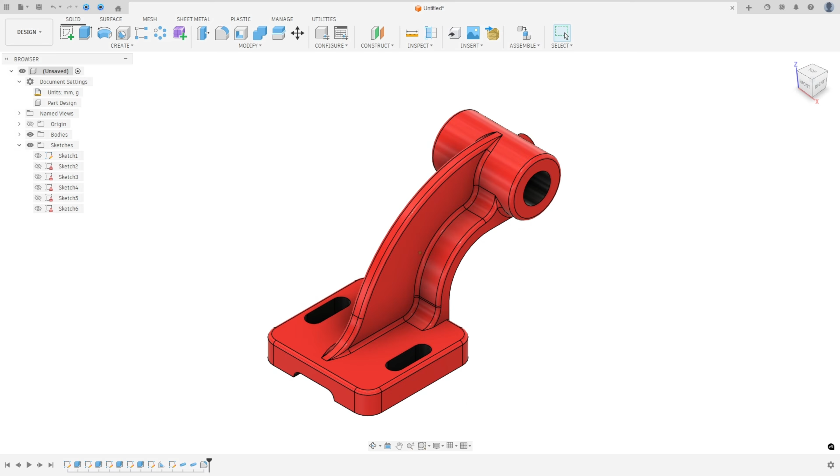The first step to create this part, we will select the top plane and create this sketch. We will create the base first. The base is a square, 80 millimeters by 80 millimeters, and in the corners we have a fillet with 10 millimeters of radius.

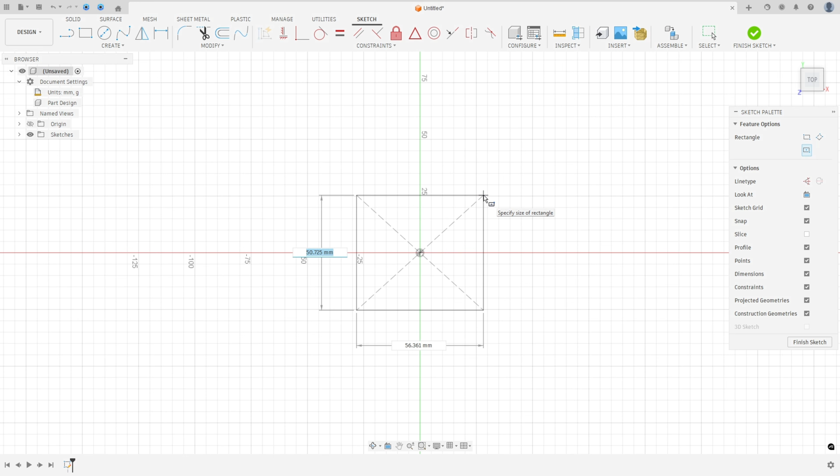So we'll open Fusion, go to create a sketch and select the top plane. Select 2-point rectangle, center rectangle, click here in the midpoint, 80 millimeters by 80 millimeters. And go to fillet, make a fillet here with 10 millimeters of radius. Press OK.

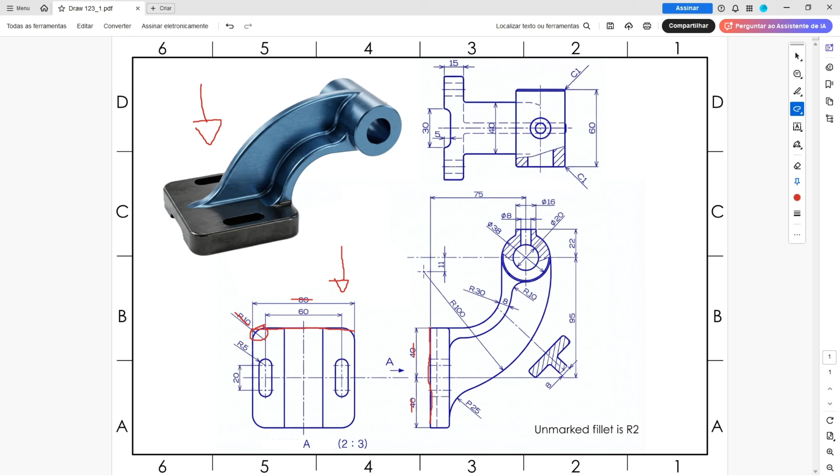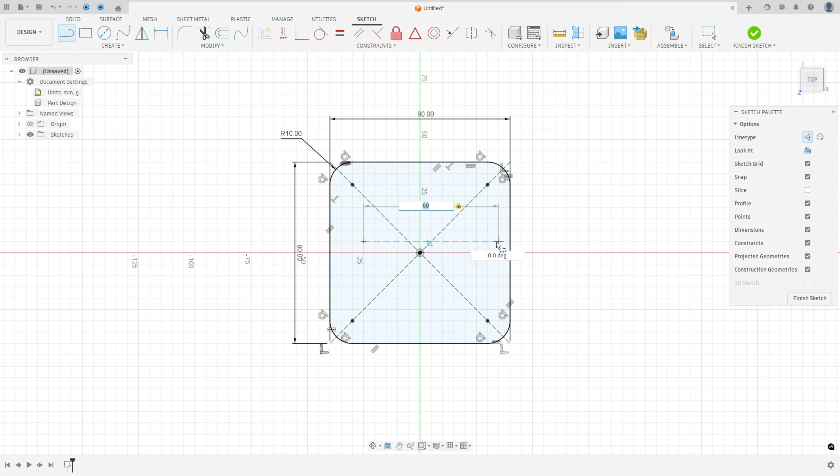Now we will create this slot. But first we'll create this center line here. The distance between this slot and this one is 60 millimeters. So select line, a construction line, make a construction line here with 60 millimeters of length. Go to constraint, select the midpoint, select this line and the center point here. I will hide some constraints here.

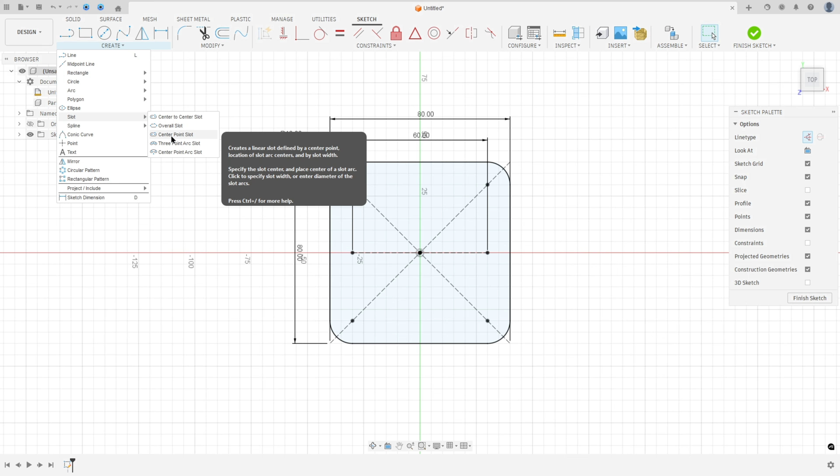Now we will create the slot. The slot has 20 millimeters and the radius is 5 millimeters. So go to create, select slot, select center point slot, click here in the midpoint, remove the construction line type. Make a slot here. Go to sketch dimension: the distance here is 20 millimeters and the radius here is 5 millimeters.

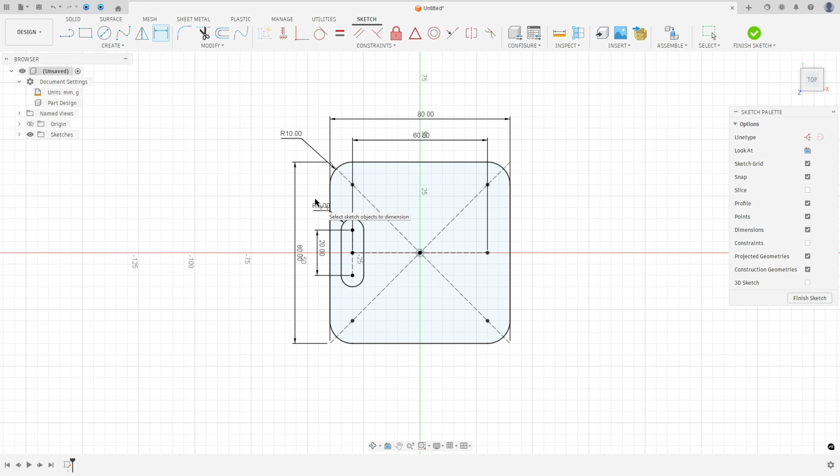Select line, a construction line, make a construction line here in the center, and go to mirror, select this slot, and the mirror line is this construction line. Press OK. We made this one.

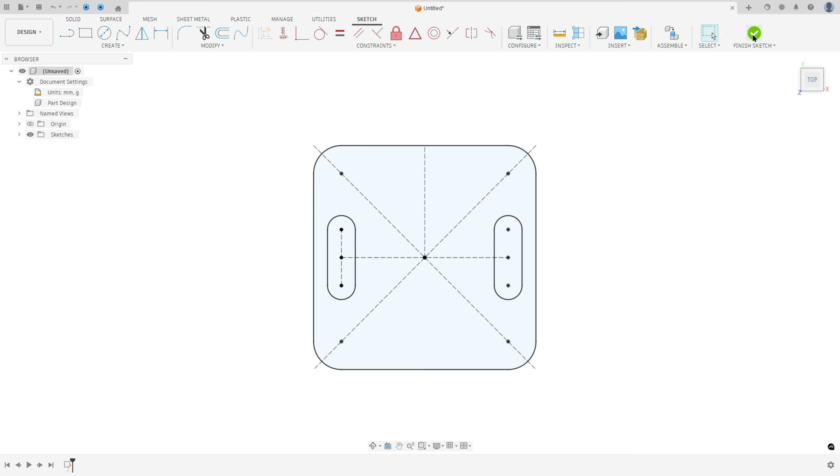Now finish the sketch. We need to extrude this 15 millimeters. So go to extrude, select this profile, 15 millimeters of length, operation new body, and press OK.

Now we will create this cut in the bottom of the base. This cut has 30 millimeters by 5, and here the fillet will be 5 millimeters. So go to create a sketch and select this face, select a 2-point rectangle, make a rectangle here, 5 millimeters by 30 millimeters.

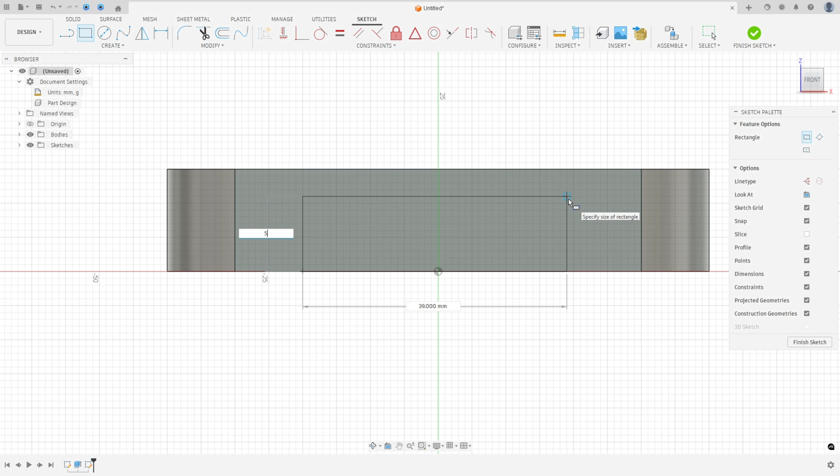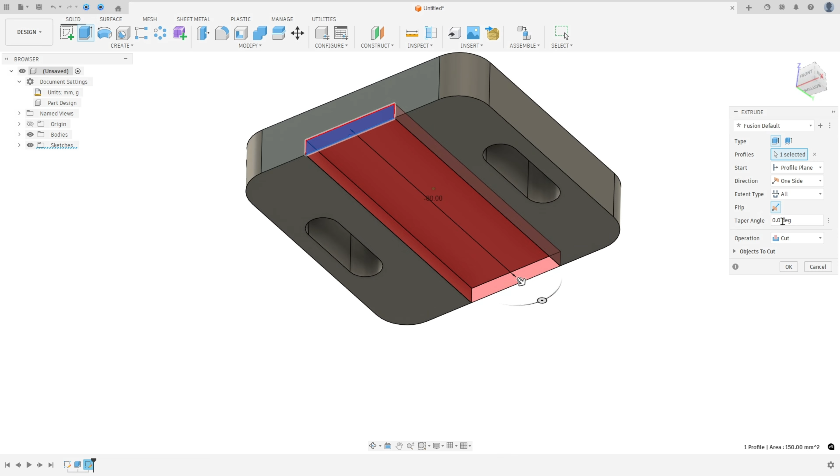Go to constraint, select the midpoint, select this line and the center point here. Finish the sketch, go to extrude, select this profile. The extent type, select all, flip the direction. Operation here is cut, press OK. Now go to fillet, select this edge here and this edge. The fillet here is 5 millimeters, press OK.

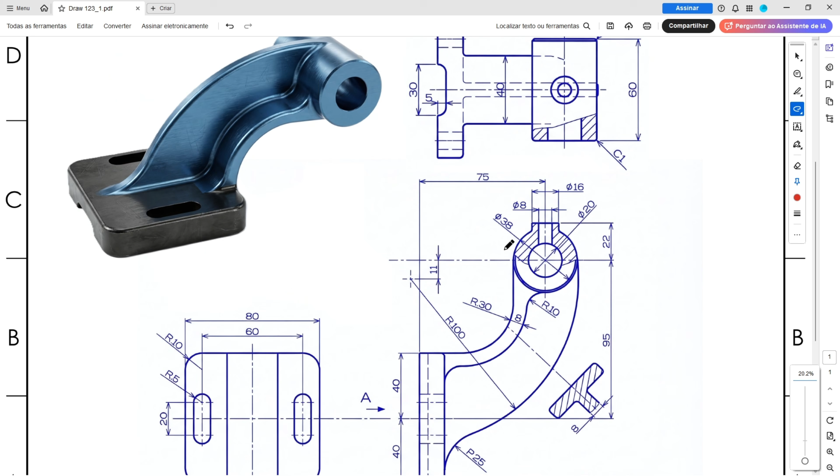Now we will create this cylinder. The cylinder is 2 circles with 38 and 20 millimeters of diameter. So go to create a sketch and select the right plane.

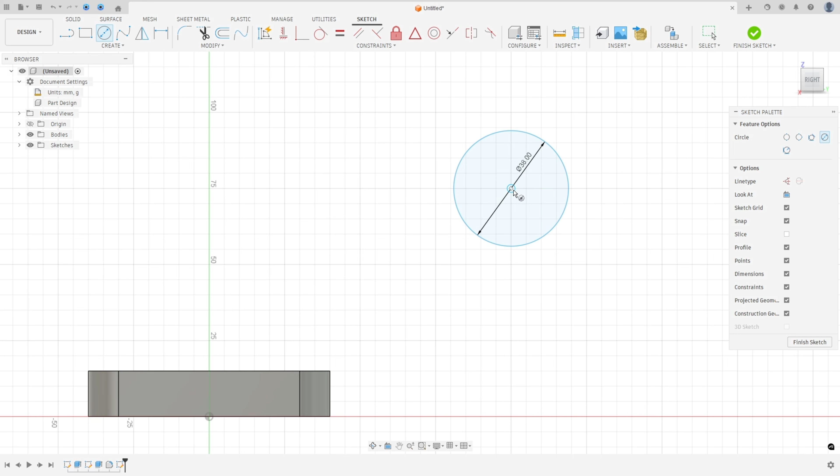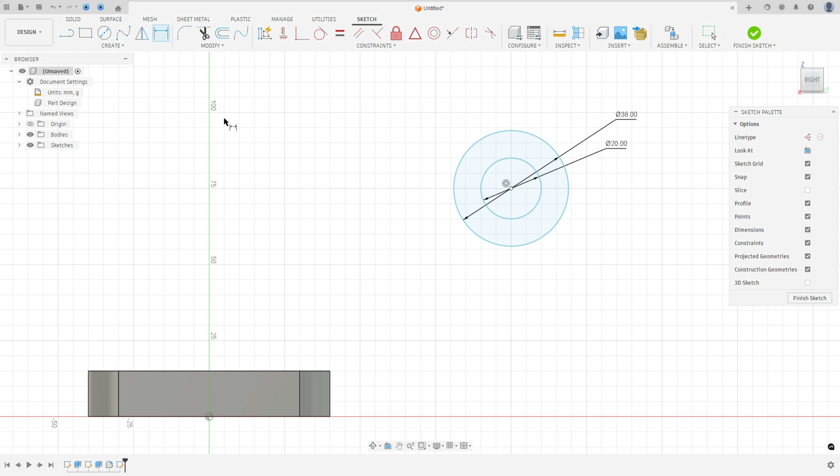Select a circle. Make a circle with 38 millimeters of diameter and another one here with 20 millimeters of diameter. The distance between the center of this circle and the midpoint is 75 and 95. So go to sketch dimension: the distance here is 75 millimeters and the distance here is 95 millimeters.

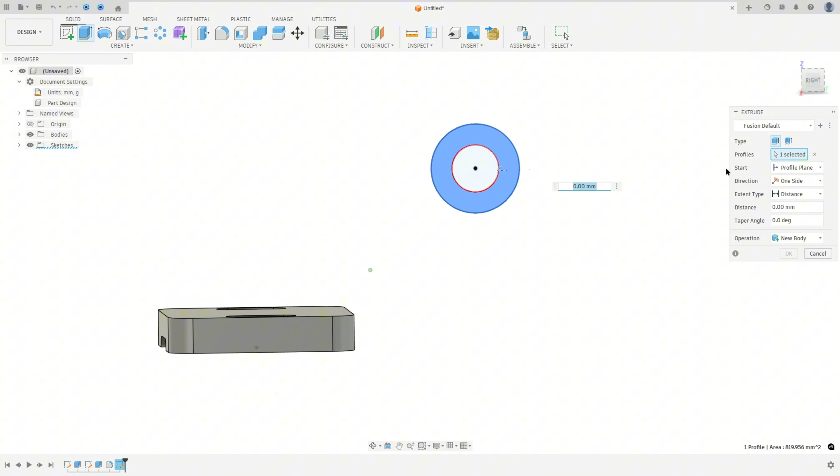Finish the sketch. We needed to extrude this 60 millimeters. So go to extrude, select this profile. The direction, select symmetric, measurement whole length, and the distance here 60 millimeters, press OK.

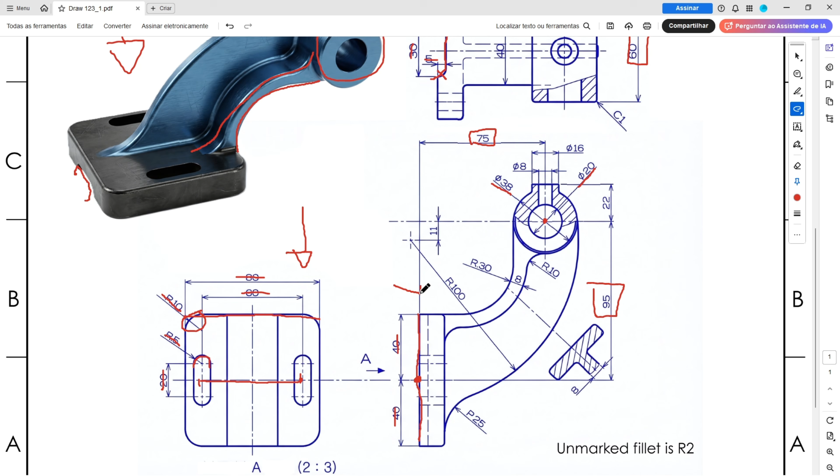Now we will create this area. We will select the right plane and make this sketch. The first thing we make here, we will create a line, an arc, and another line. This line is coincident with the circle, and this point here is vertical with this point.

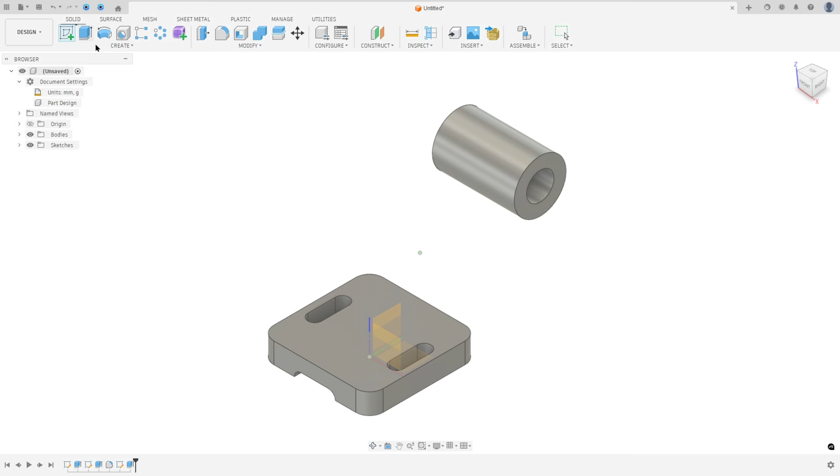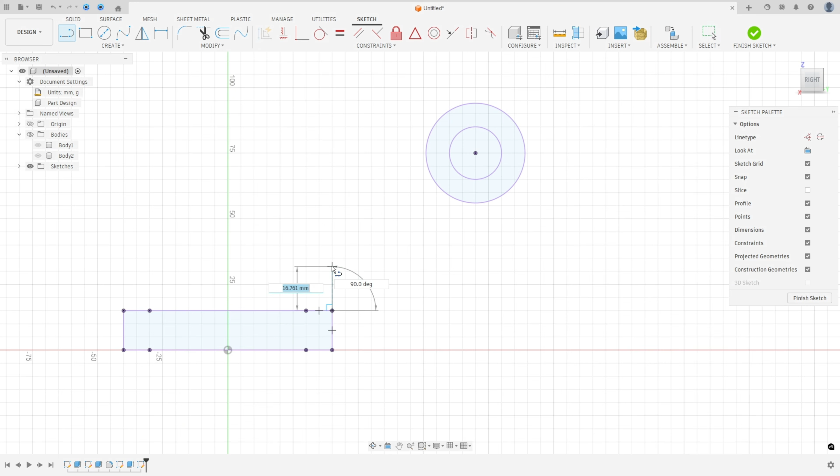So go to create a sketch, select the right plane, and go to create project, include project, selection filter. Select the body, select these two bodies here, and press OK. I will hide this body a little bit. And here select line, make a line here, make an arc and another line here.

Go to constraint, select tangent, select this line and this arc, and make sure that this line is tangent with the circle. Go to horizontal vertical, select this line here, make sure that this line is horizontal and this one is vertical. The radius here is 30 millimeters. So go to dimension, select this arc, the radius here 30 millimeters.

Now we will create this sketch here: an arc here, another arc here, and another one here. This arc has 10 millimeters of radius. This one has 100 millimeters of radius.

Go to create, select the arc, 3-point arc, make an arc here, and make another arc here. And I will create a line here.

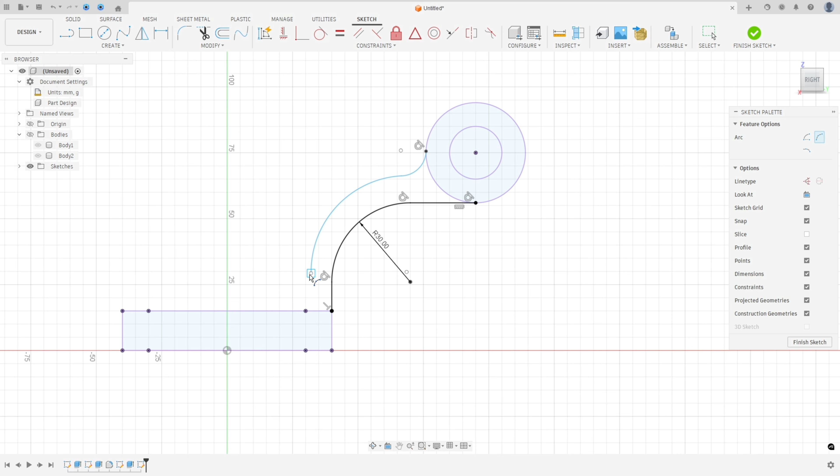Go to constraint, select concentric, select this arc and this one. Go to dimension. The radius here is 10 millimeters. Make sure that this arc is tangent with this one.

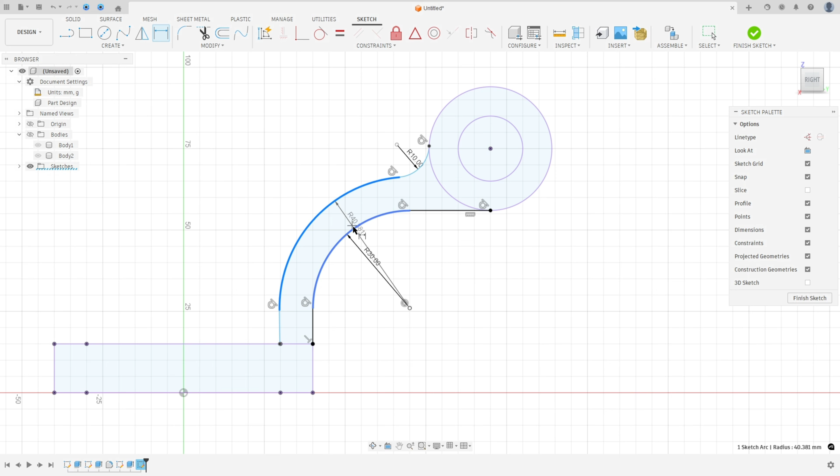The distance between these two arcs is, I said 100 millimeters, but that is wrong. The distance here is 8 millimeters. The 100 millimeters is for this other arc here, which we will make later.

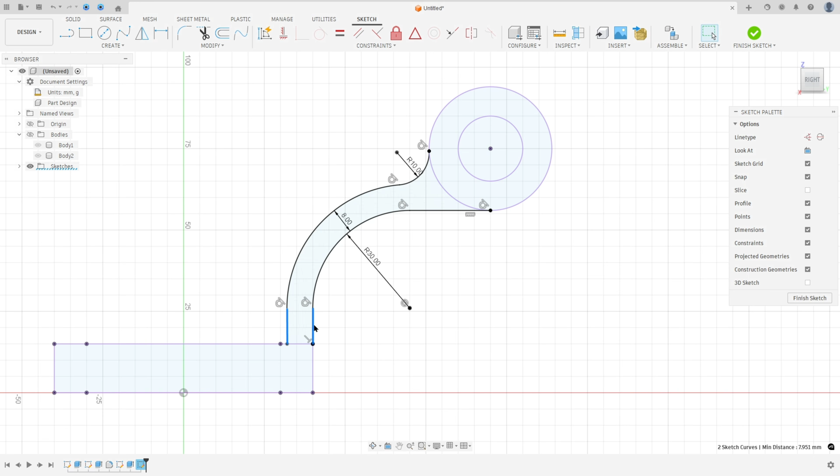And the distance between these two lines, make these parallel lines. Now we will create this arc here, tangent on both sides. Go to arc, 3-point arc, click here and click here, make an arc here, and go to constraint, select tangent, select this arc and this arc here.

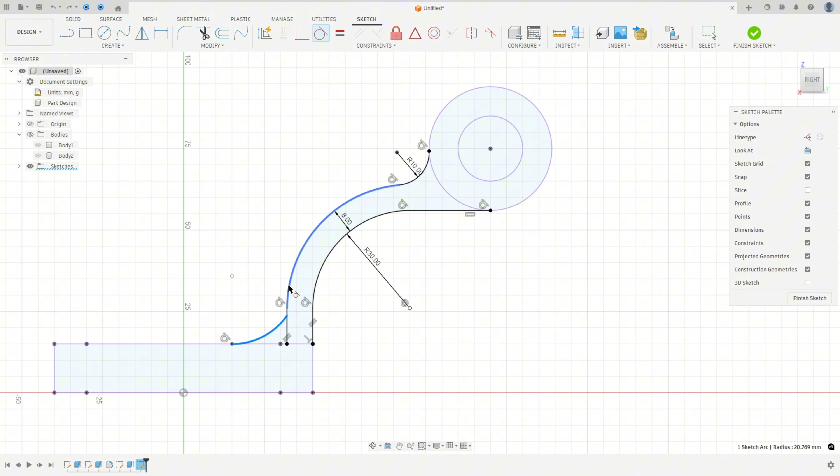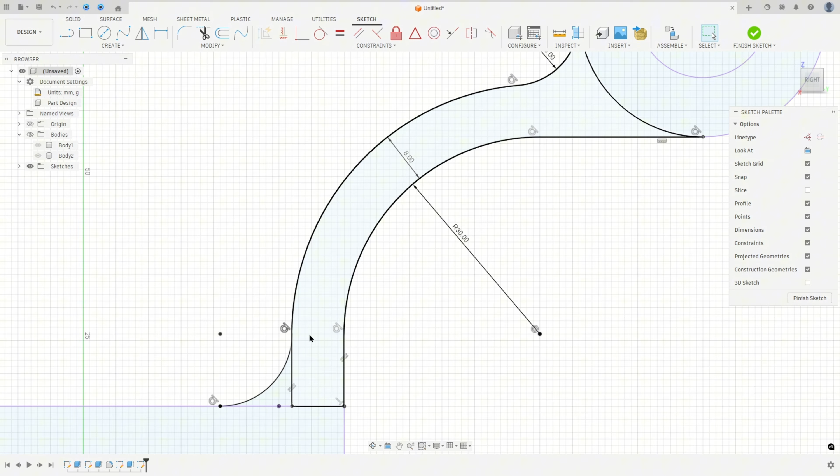Make sure that this point here is coincident with this arc. Go to modify, select break this line here, and make this a construction line type. We made this profile, so finish the sketch.

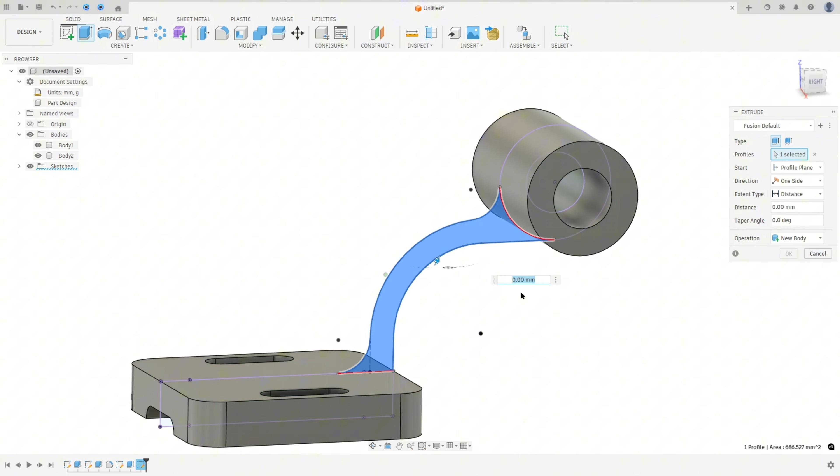Go to extrude, select this profile. We need to extrude this 40 millimeters. So the direction symmetric, measurement whole length, and the distance here 40 millimeters. Operation join and press OK.

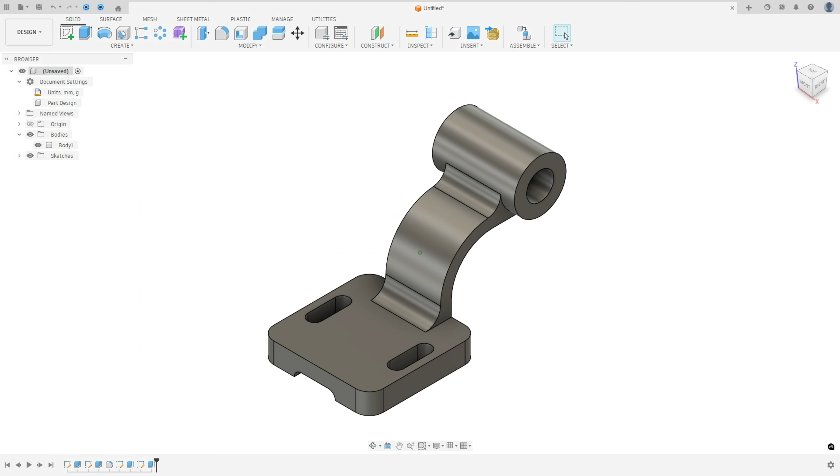Now we will create this rib. This rib has 100 millimeters of radius, and we have another arc here with 25 millimeters of radius. Go to create a sketch, select the right plane, press letter P in the keyboard, selection filter body, select this body here and press OK.

Go to create, select arc, 3-point arc. Click here in this circle, make an arc here, and make another arc here. This arc must be tangent on both sides, and go to sketch dimension. This arc here has 100 millimeters and this one has 25 millimeters.

And the distance between the center point of this arc and this point here is 11 millimeters. Let me move this point here a little bit. Go to dimension, the distance here, 11 millimeters.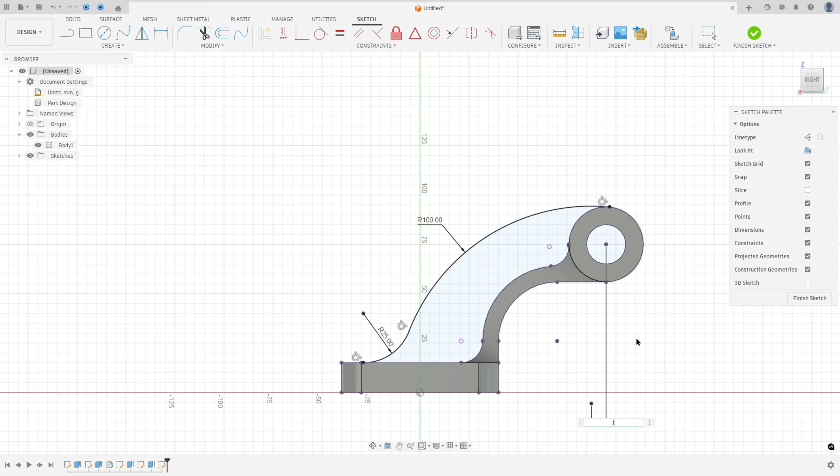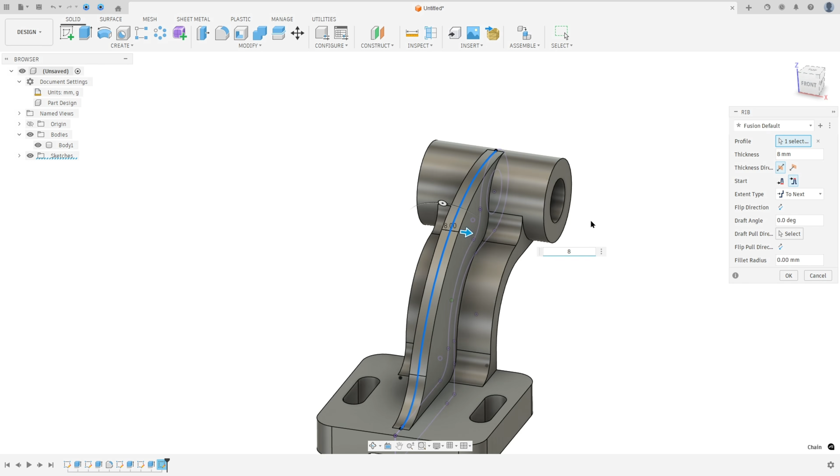Finish the sketch. Go to create and select rib. The profile, select this one, this line here. The thickness here is 8 millimeters, and the thickness direction symmetric, press OK.

Now we will create this cylinder here. The diameter 16 millimeters and the distance between this face and this point 22 millimeters. And we will create this cut with 8 millimeters of diameter.

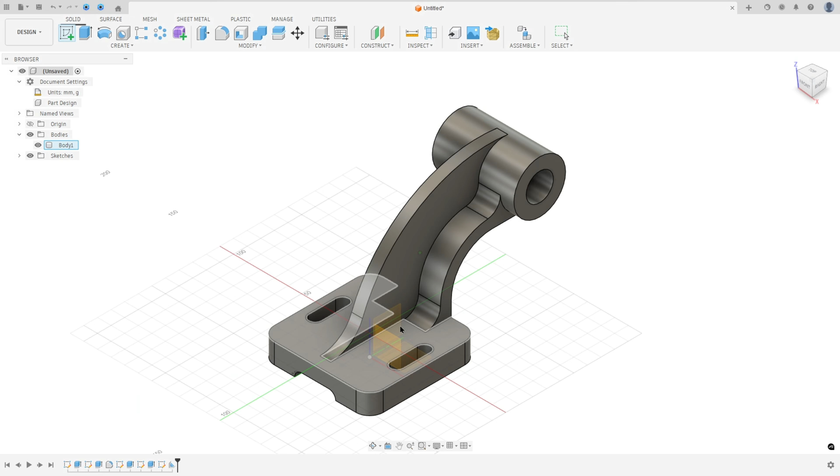Go to create a sketch, select the right plane, and go to create, select project include, project, and selection filter specify the entities, select this face here and press OK. Now select line, make a line between this point and this circle here, and make a line between this point here to here.

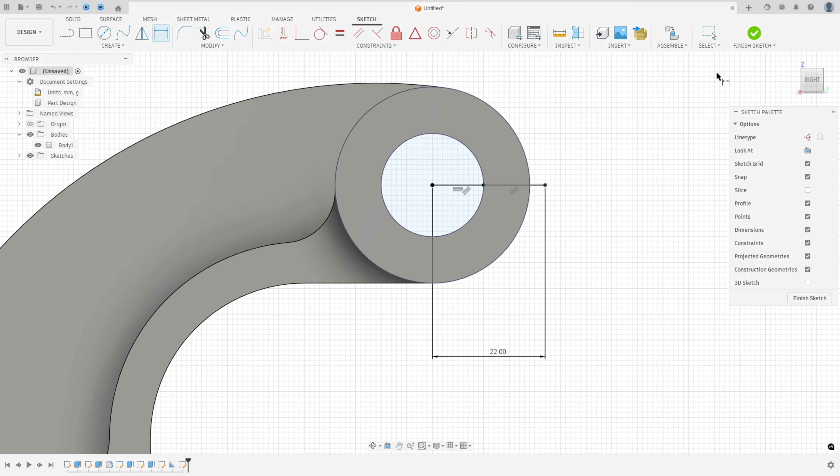And go to sketch dimension, select this point and this point. The distance here is 22 millimeters. And finish the sketch. Go to pipe.

Remove the chain selection. Select only this line here. The section size here is 16 millimeters. Operation join and press OK.

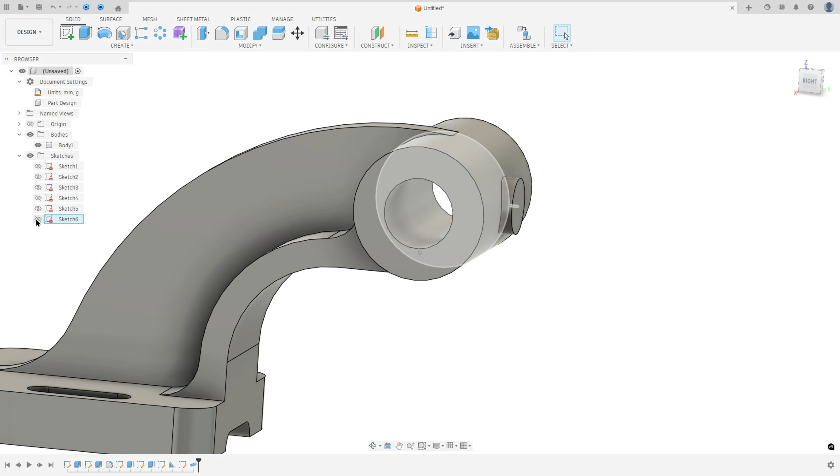And show the sketch 6 again. Go to pipe, activate the chain selection. Select this line. The section size here is 8 millimeters. Operation cut. And press OK.

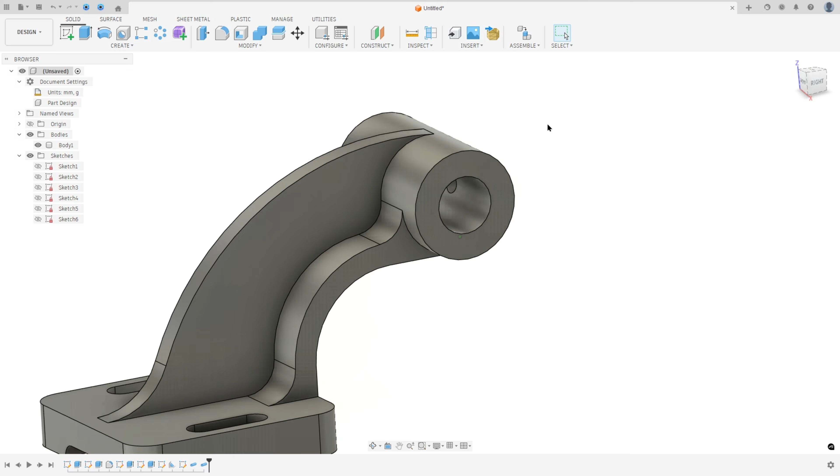Hide this sketch. And now we will make some fillet here. The fillet 2 millimeters. So go to fillet, select this edge here.

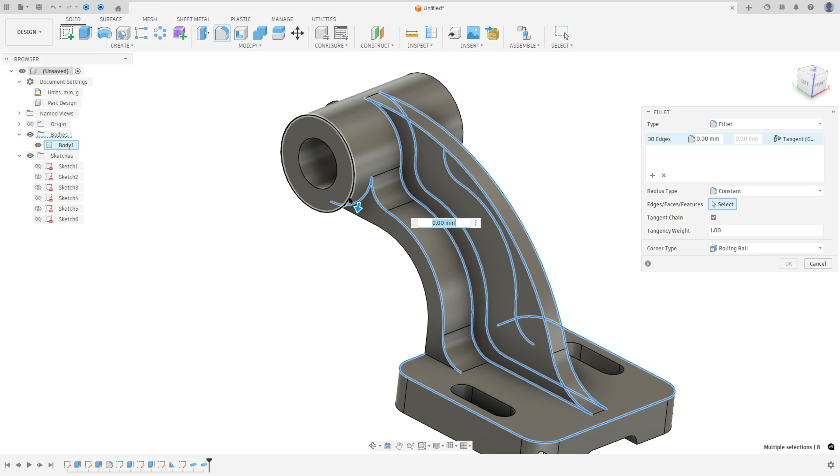The fillet here is 2 millimeters. And press OK.

And here we finish our exercise.